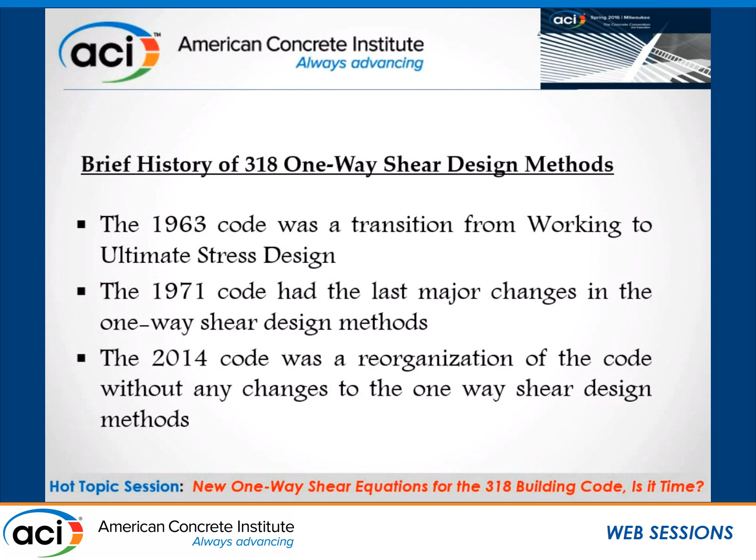They might have undergone some minor changes here and there, but the major equation that we have in the code is as old as 1971. And then, as you know, in 2014, the 318 went through thorough reorganization of the code, and only at that time were we asked by Dave Sanders to look into maybe looking at this one-way shear design equations.

If you go back to what used to be Committee 426, in 1973 they expressed the hope that the design regulation for shear strength can be integrated, simplified, and given a physical significance so that the designer can approach unusual design problems in rational manners. As a matter of fact, they wanted that hope to be achieved within two decades, so we're talking about 1993.

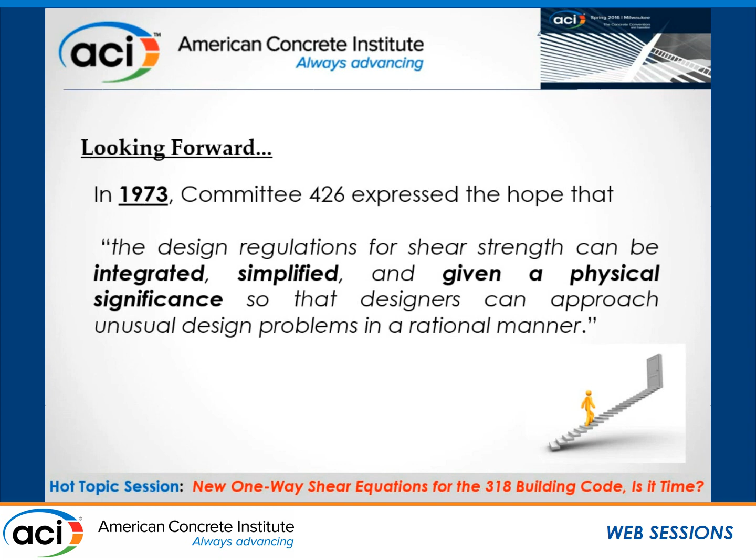We're not there yet. Right after the print of the 2014 code and before Kansas City in 2015, the chair of 318E, David Sanders, approached me and asked if we could look into the one-way shear design equation within 318 by investigating the effectiveness and safety of the current 318 one-way shear design, and also look at other models that appeared before, that people were debating, if you remember the quick fix. We started looking thoroughly at these models so we could have a groundwork to come up with some design equations.

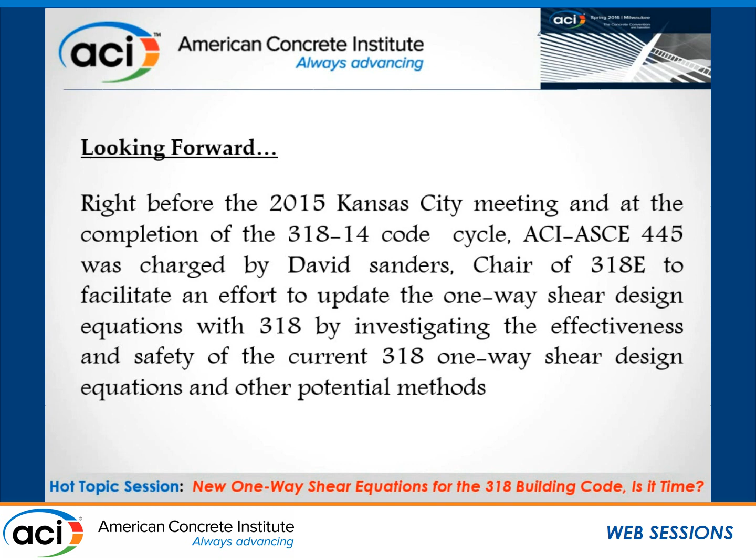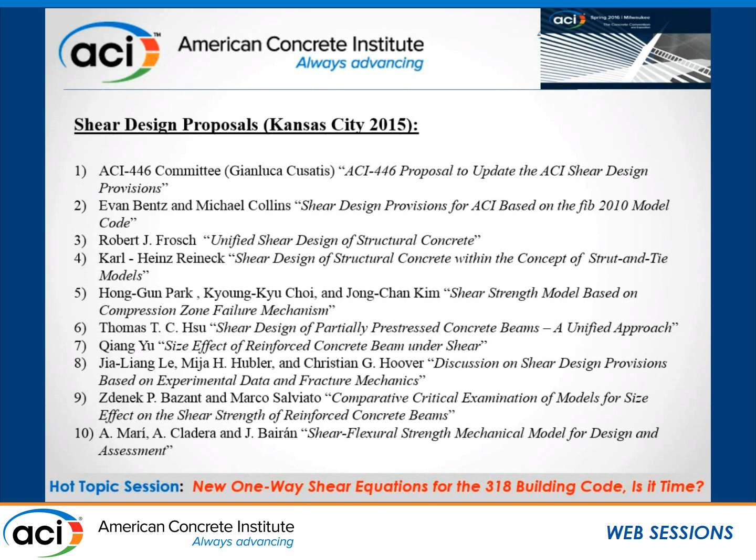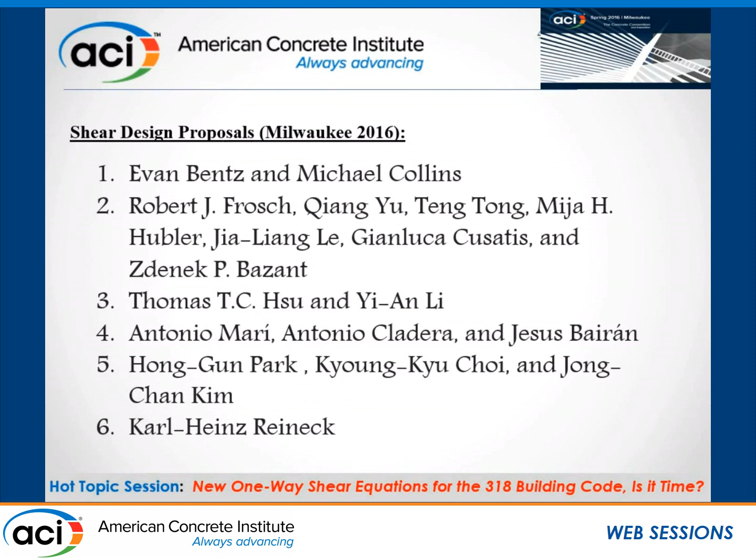So in Kansas City, we made a solicitation internationally to see who had a model for one-way shear design. These are the 10 presentations that we have at the 445 meeting in Kansas City. Since then, this list of 10 proposals ended up to be 6, so today we'll be listening to 6 proposals, and these are the authors of the 6 proposals.

Since then, what we did, we looked at all these 6 models. As a matter of fact, we started with 7 models, and then reduced to 6 models, or 6 methods. And we did 3 things.

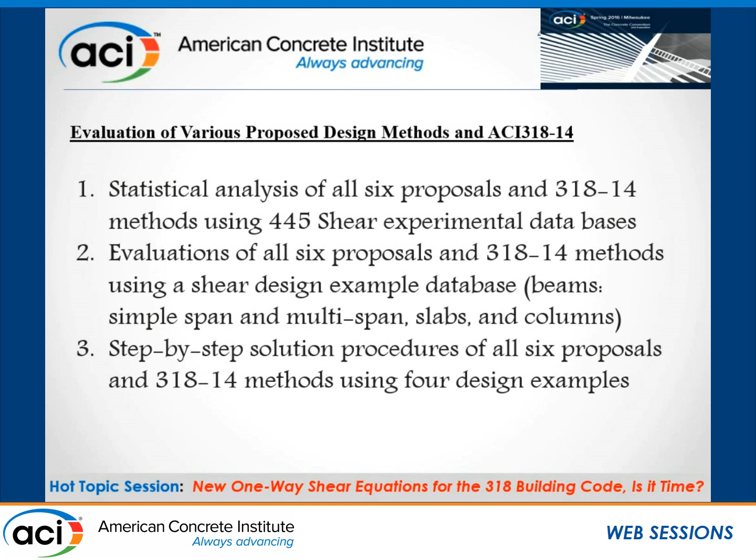One, we ran the statistical analysis of the 6 proposals, as well as the 318-14 design equations, through some experimental database that 445 has generated since then. We also looked at the evaluation of all 6 proposals against the 318 method, and came up with a design database that implements all these models for design examples. Then we asked each proposer to come up with a step-by-step calculation for 4 examples using their method.

In terms of the shear experimental database, these are some of the databases that 445 has generated in the last decade. We have 4 sets of databases: one for reinforced concrete without shear reinforcement, with 784 data points; RC with shear reinforcement, 170 data points; PC without shear reinforcement, 214; and PC with shear reinforcement, 119.

The 445D subcommittee, which is in charge of this task, is also looking at other databases, and these are the list of things they've been working on. This database, those 4 sets, has also been published in the ACI Structural Journal, September-October 2013 and September-October 2014, and we also have a report that is online.

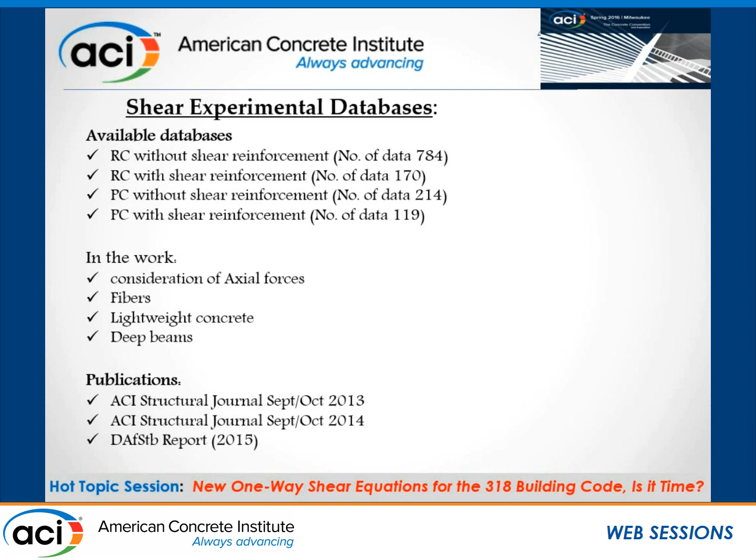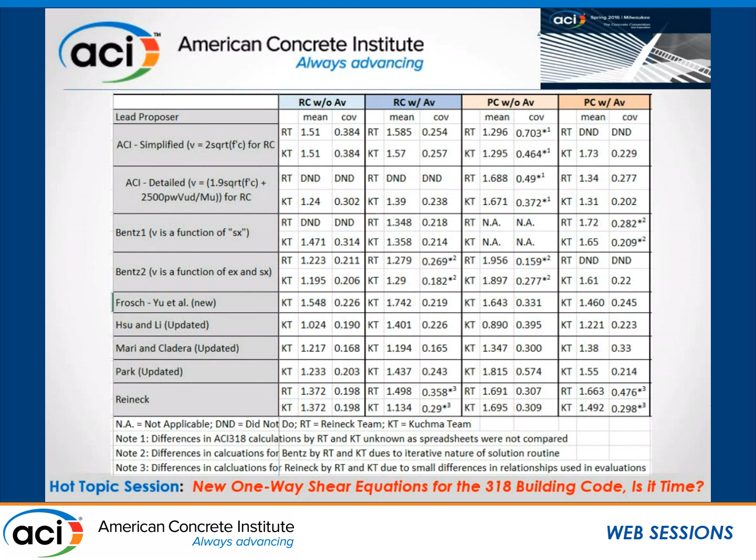I don't want to go through all this table here, but this gives you some taste of the analysis we did, the statistical analysis of all the models, including ACI 318-14. You have here the means and the coefficient of variation.

This is for the RC with shear reinforcement. This is for PC without shear reinforcement, and these are for PC with shear reinforcement.

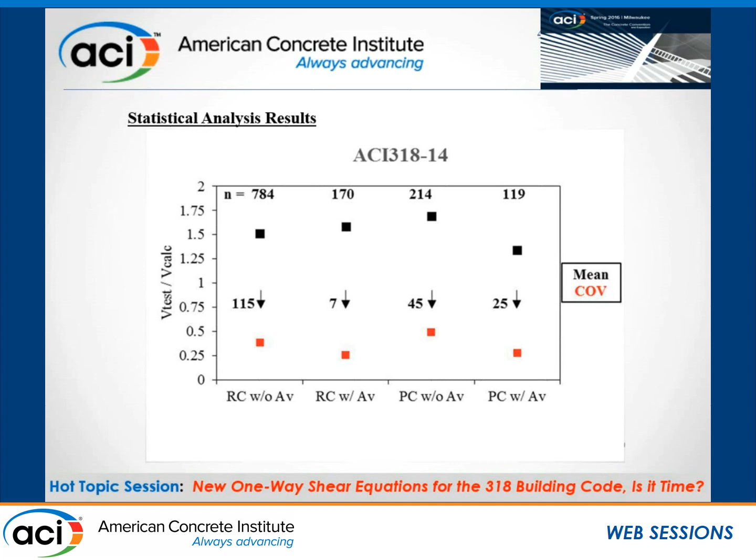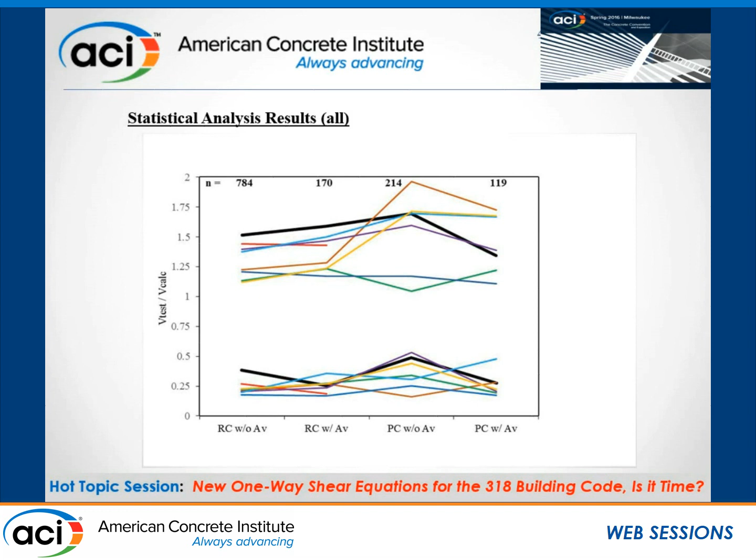On top of this, we plotted all the models that we received since then. As you see here, the dark one is ACI 318-14, and the others are all 7 models. I don't have them here by name, but these are all the various models we received. This one gives you V-test over V-calculated. This shows the low and high of all the data across all the models, and the star gives you the location of where ACI falls.

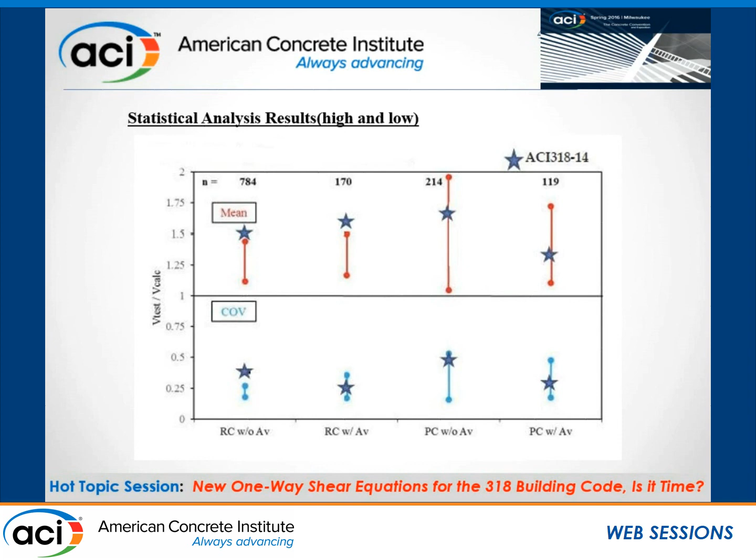So you see, for example, in this case here, all the models are slightly below what ACI is, and this is the low and this is the high. This is for the averages, and this is for the coefficient of variation.

Now, one day, David Sanders approached me, and we said, let's work on this one. He set as a goal that hopefully we can push this one for the next code cycle, 2019. And then we set here some of the dates that we have to achieve as milestones.

If we look here from the top, by October 2018 the TAC review began after the fall 2018 convention. At the fall 2018 convention we have the last convention to resolve all the negatives, and in March 2019 response to TAC comments and release to public comments. Summer 2019, a meeting to resolve the public comments, and October 2019 the code is basically finalized.

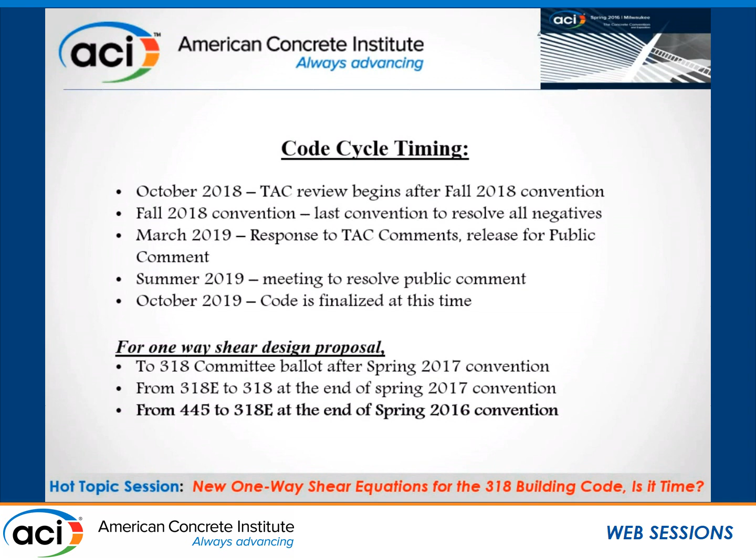As for 318E and 318, this has to go to 318 committee ballot after spring 2017, which is basically a year from now. From 318E to 318 at the end of spring 2017, and from 445 to 318E, which is basically this convention. So after today's meeting, we are passing all the packages to 318E to deliberate on.

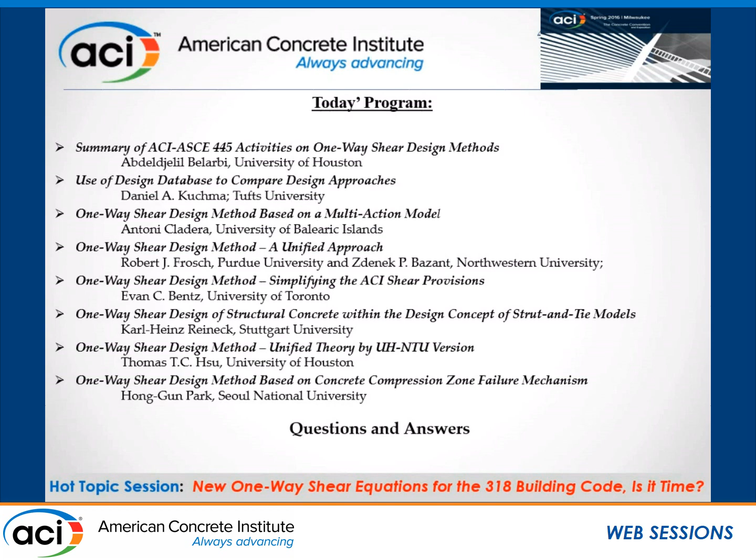This is the list of all the speakers that we have today. I was first. We have Dan, who's going to speak mainly on the use of the design example database and how all these models compare versus ACI 318-14. Then we're going to have the chance for all the presenters or proposers to speak for 8 minutes to give the attributes of their model.

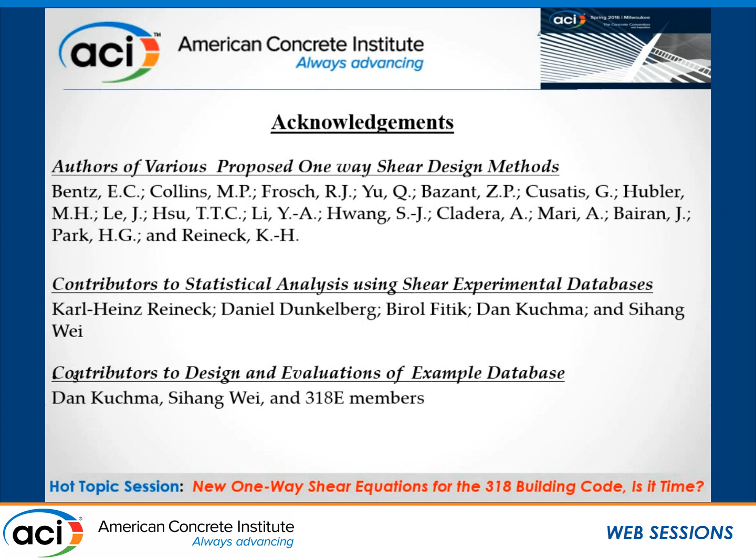Before I finish my talk, I would like to acknowledge all the people who participated in this effort. The first group are the people who are either author or co-author of all the 6, maybe 7 models — these are all the people here. And these are the contributors to the statistical analysis that was done by Professor Reineck, some of his helpers from the Europe side, with Dan Kuchma and his student Sihang, and members of 318E. They're the people who contributed to the design evaluation and the design examples. With that, thank you, and I will turn it now to Dan Kuchma.

Thank you very much, DJ. Great to see that we have a full house. DJ was right, the room was going to be a little bit small.

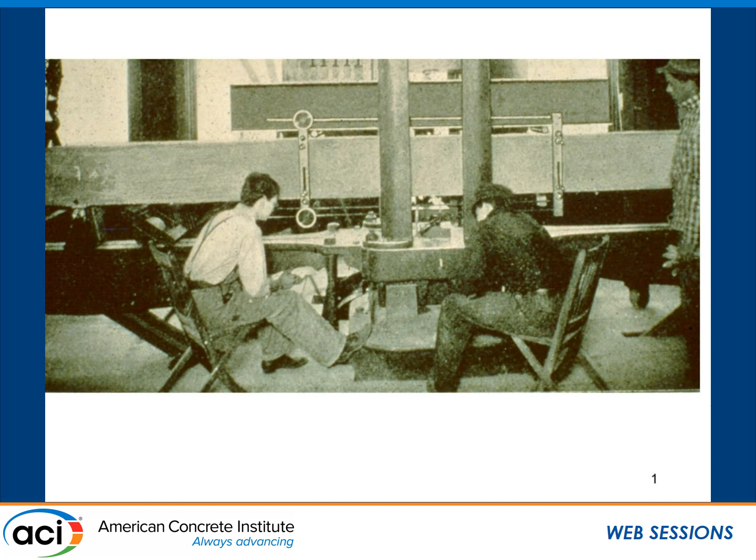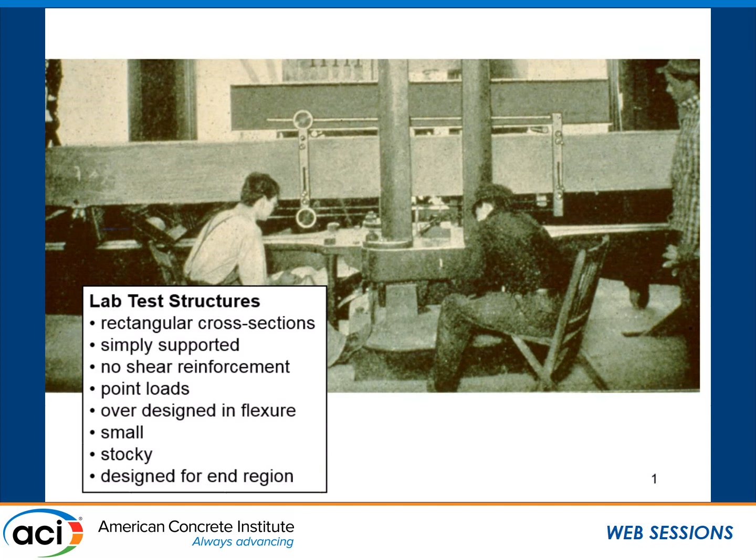So anyhow, this is a picture of some tests at the University of Illinois from a very long time ago — you can probably tell from the uniforms. DJ was mentioning that there were some comparisons made against experimental databases. I think one of the things we recognize is that what we test in laboratories doesn't necessarily represent what we build in the field, and there are a number of different reasons for that, as you can see from the various differences.

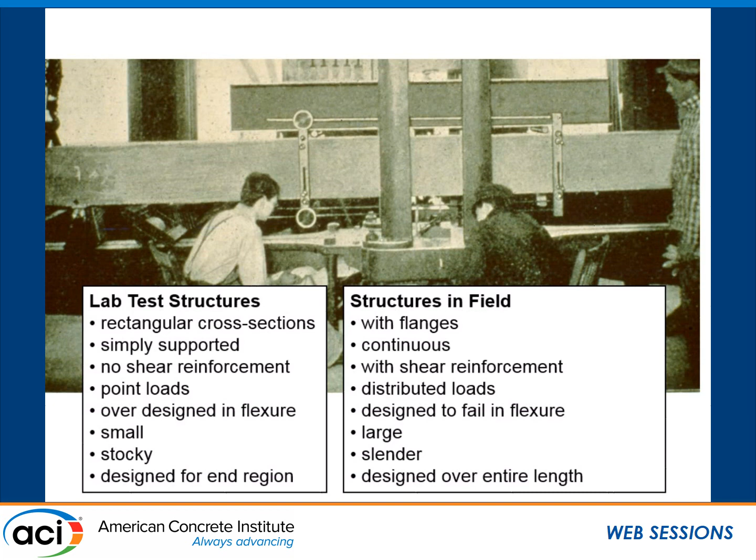Obviously there's a size and a cost factor. One of the other items that's perhaps not always appreciated is that when you look at some of the statistics from the experimental databases, it's not as if we have a uniform distribution across the various size ranges, etc., so we do have challenges with bias in experimental data that we have to deal with.

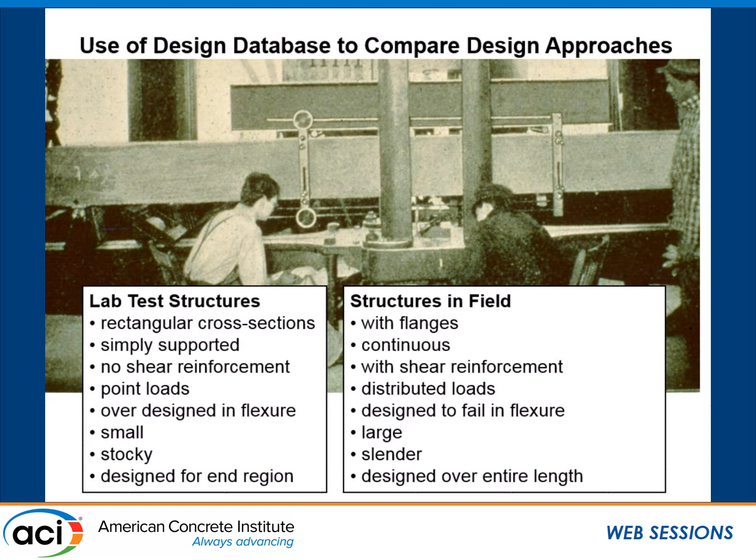What I'm going to talk about today is another way to go through and examine design approaches, where we have a suite of a large number of different design cases, and for those design cases we compare how much shear reinforcement would be required, what the depth of the beam needs to be, etc., if there's no shear reinforcement.

So there's some use in doing this, and some of the motivations are — I think a lot of this is, if you are a code of practice committee and someone is proposing a change, one question you have is: how much is this actually going to change what would be required? And one way of characterizing the amount of shear reinforcement is the percentage of vertical reinforcement times its yield strength.

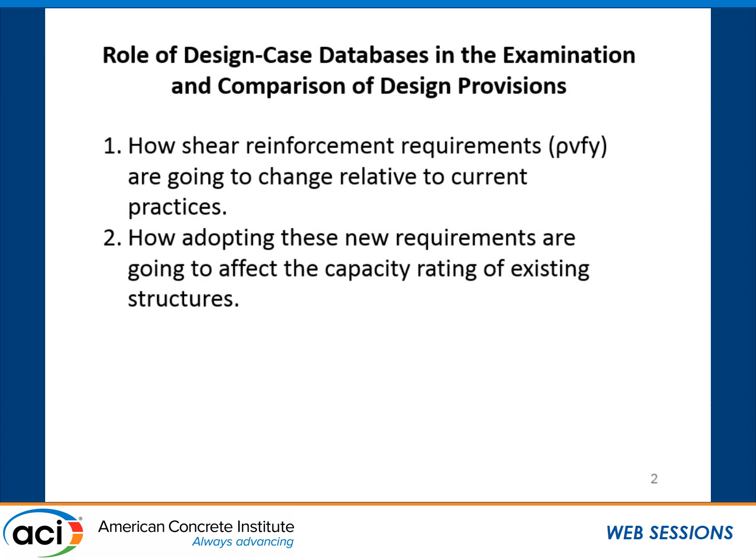And it's not just new design — very often, of course, we're using provisions for capacity rating. One of the other things, if you were a code body, you might wonder — if you see there's going to be some significant differences in requirements, you want to know where are they occurring, and are they occurring in areas where we actually think field experience is suggesting there could be improvements in performance? And so field experience becomes relevant.

What I'm going to do in the next couple of slides is talk about another aspect of what I think makes a design database useful, and it pertains to how we examine whether or not our provisions have some gaps, inconsistencies, and other types of problems.

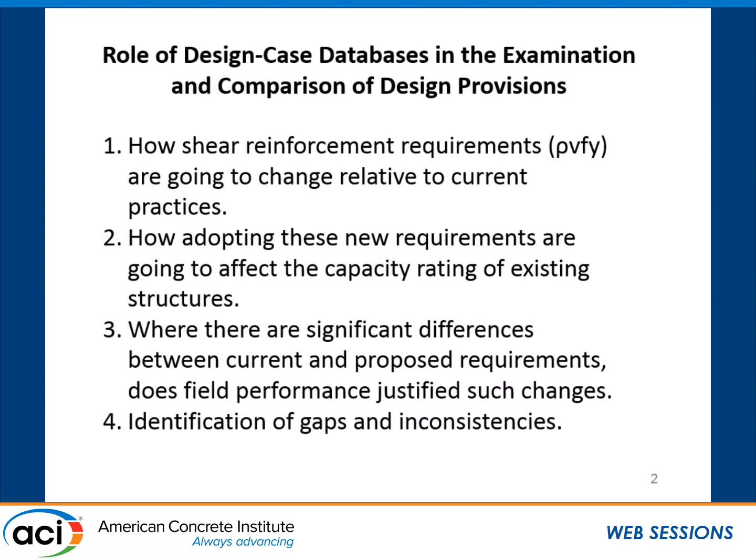I'm going to start by talking a little bit about ACI, and then I'll go on to describing this design database and how it was used.

When you looked at it that way, they said, we have this 45-degree truss for the VS, so why don't we add something we call a concrete component? It seems as if it's pretty much the diagonal cracking load, at least from a lot of tests, so let's use that. And we're familiar with our friend, VC equals 2 square root F prime C.

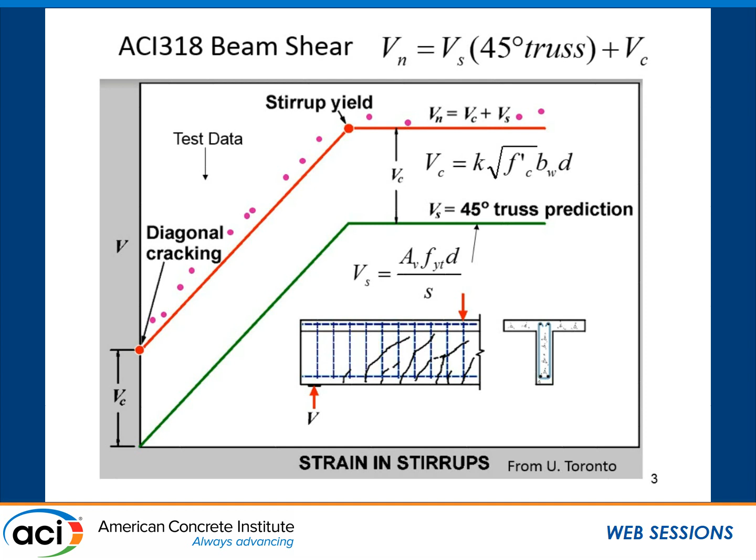But what ACI did was more like K square root F prime C, calling it the diagonal cracking load, and always adding that to the 45-degree truss. It's not quite that pure though, and I want to talk about that for a moment.

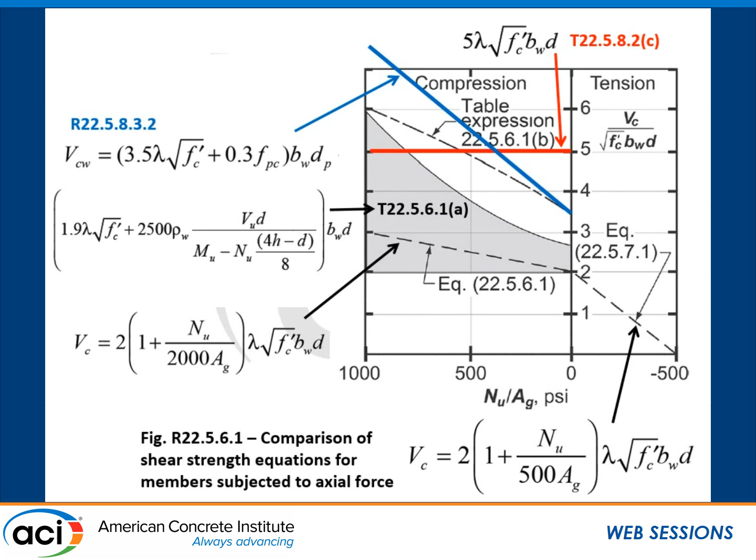There's another approach for web shear cracking, with a relationship that starts at 3.5 root F prime C and goes up at this particular angle. There's also, of course, this other one which has to do with flexure shear cracking.

What I was trying to convey in this slide is this should be something nice - it should be a line, right? What is the influence of axial stress on the contribution of concrete in shear? Shouldn't this just be a line? Should it really be this many different relationships?

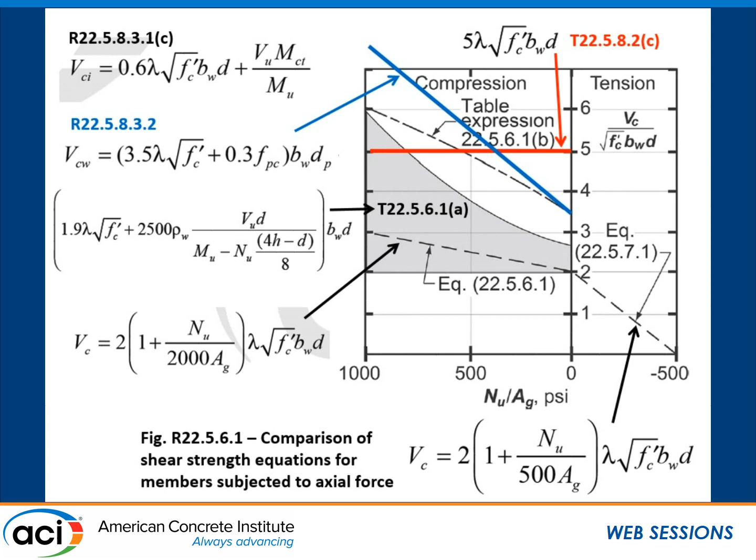So what we have in ACI - I know a lot of people characterize this effort as trying to address the safety concern for the size effect in shear, but that's not the whole story. There are other areas as well that I think a lot of people think there's opportunities for improvement.

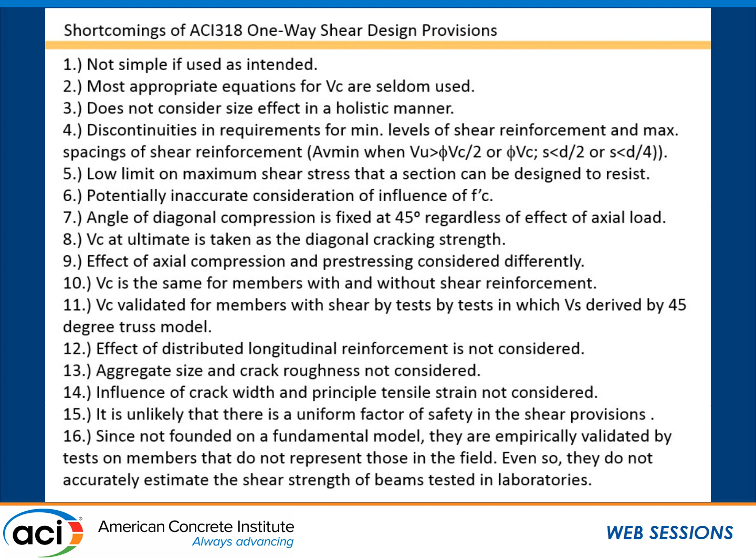What I found very nice in looking at the proposals that have come forth is that when I go down this list and think about it relative to where some of the current challenges are, I see there are by and large many fewer relationships with Vc, sometimes just a couple. Pretty much all of them can treat axial load and pre-stressing the same way. They may not have the same philosophical approach, but they agree on the principle that that would be a good thing to do. A lot of them eliminate the discontinuities that we currently have in the code. Some of the proposals also use a variable angle truss model.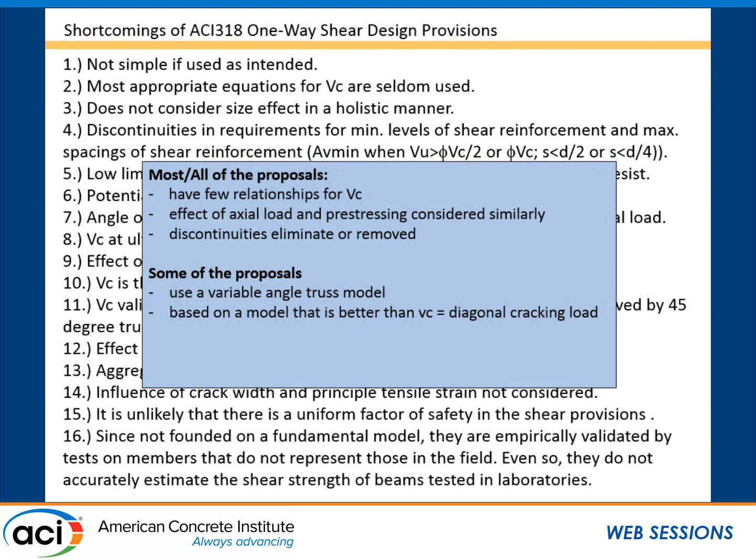I'm not saying that's necessarily something we should do, but we've moved beyond just the 45, and a lot of them are based on a model, which is helpful.

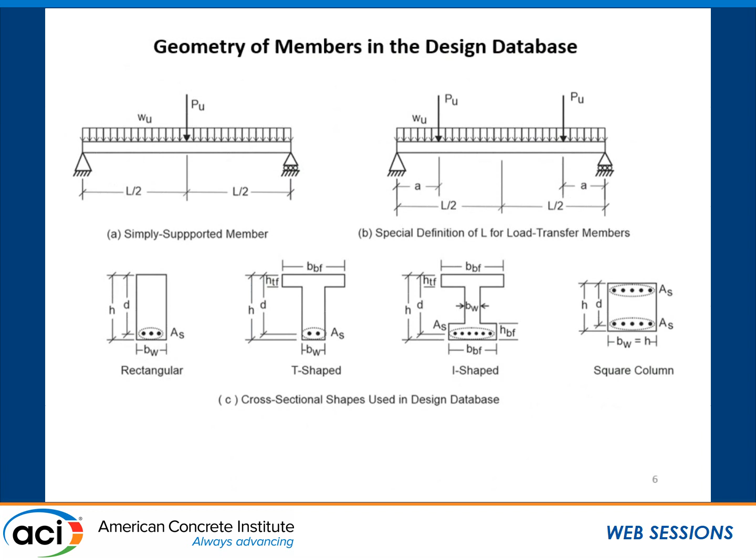Now let me describe the design database and what we've done. We looked at simply supported members, various cross-sectional shapes, reinforced and pre-stressed. We also looked at 2-span members and columns.

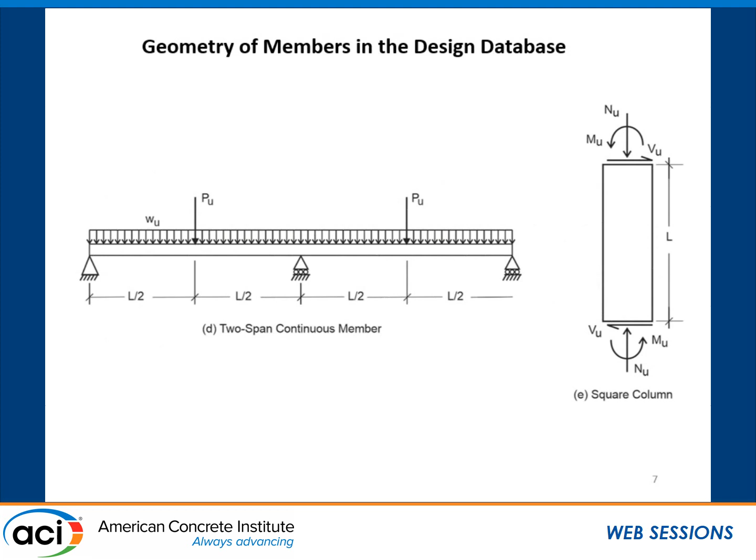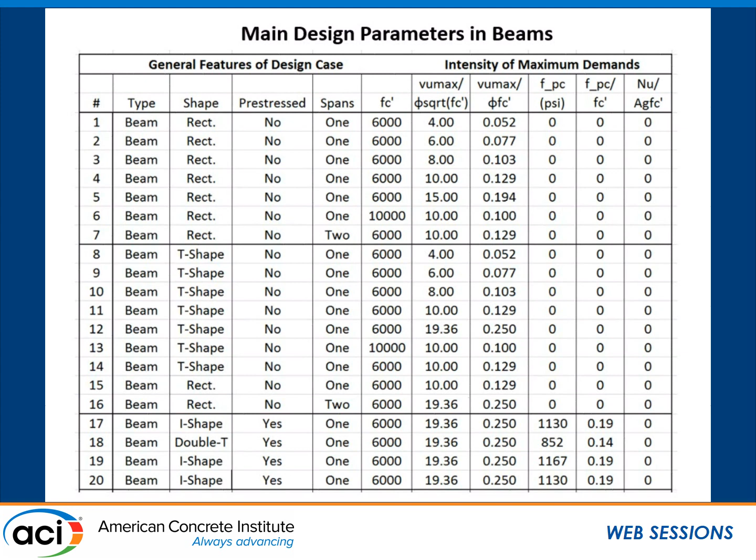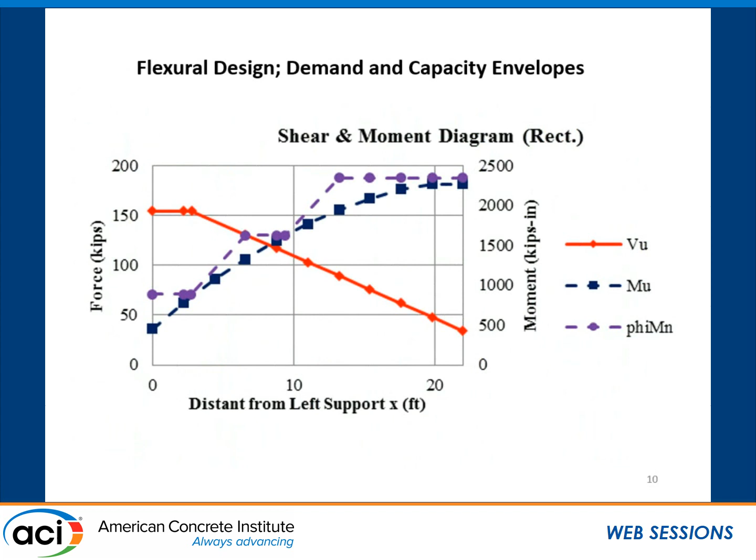The first 16 are reinforced concrete, and the last 4 are pre-stressed members. So this was the range. As mentioned, at every point over the length we determined what the shear and moment were. We did the full design for flexure, making sure the capacity envelope was greater than the demand envelope, and then we went through all the various proposals.

This plot shows the amount of steel required as a function of position over the length. Green is ACI—I'm not showing the names of the others—but this is the range of different results we received for what would be suitable levels. So it's still quite a range of ideas out there.

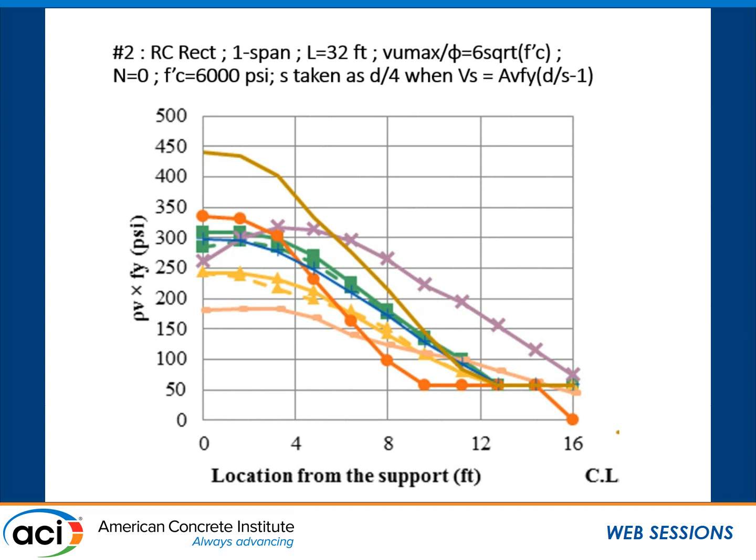We also looked at slabs, specifically slabs without shear reinforcement. For those, we asked what depth of slab would be required for different levels of superimposed load. ACI is shown in green, and as you notice, pretty much all the other proposals call for much thicker slabs. That's because of the specific safety issue associated with the size effect in shear.

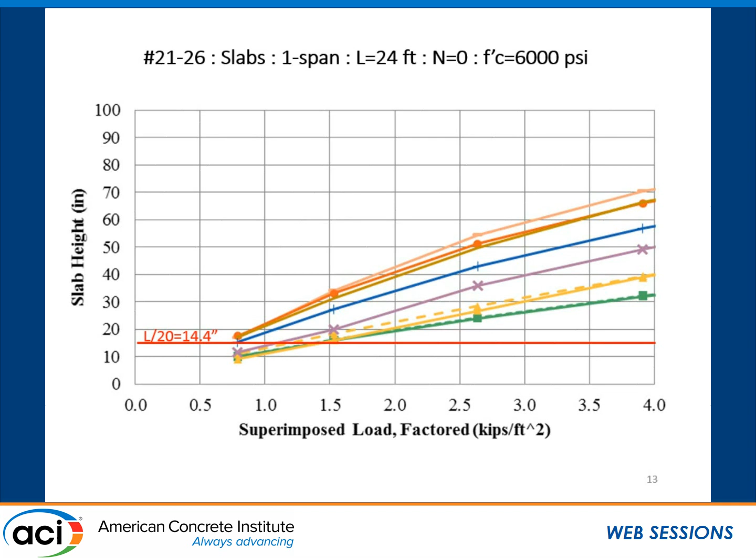So, thanks. Thank you.

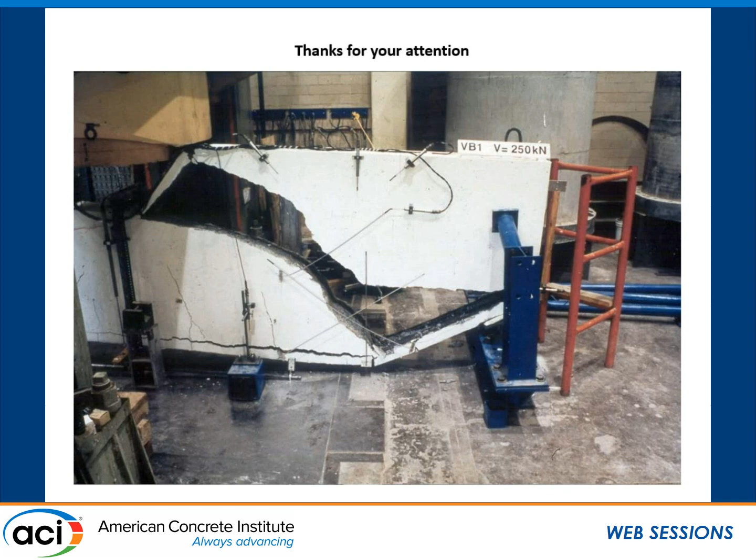Thank you very much. I'm going to present the work we've been doing in Spain at the Technical University of Catalonia, by Professor Antoni Marí and Jesús Bairán, and by myself in Mallorca.

We have presented a code proposal based on a mechanical model that we call the Multi-action Model, which takes into account the influence of the compression chord, aggregate interlock action, the tensile stresses across the crack, the dowel effect, and the steel stirrups.

When we derived the original mechanical model, we took into account equilibrium, kinematics, and a failure criterion—the Kupfer failure envelope. After that, we had one equation for each member, for each action.

What we've done is compact all the expressions, putting the residual tensile stresses inside the compression chord action and the dowel effect inside the stirrup action. This way we have a quite compact expression, as you'll see, and it's safe and economic.

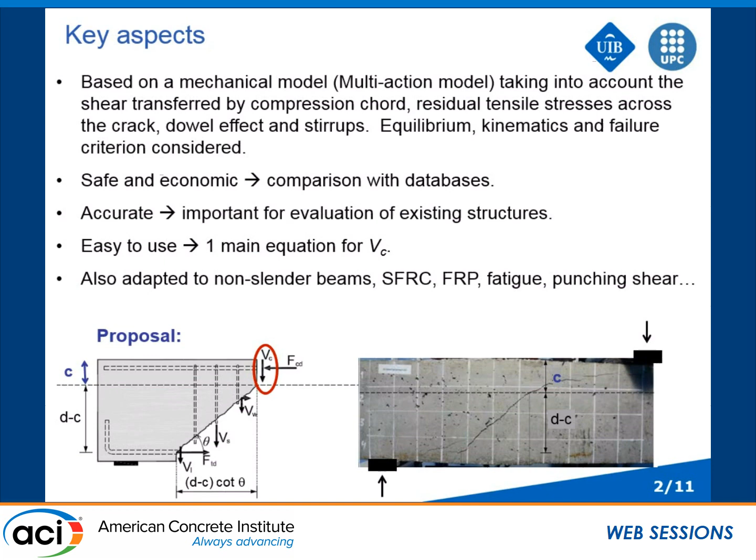We will compare with the databases. It's accurate, which I think is very important for evaluation of existing structures. It's easy to use—we have one main equation for beams for shear, plus one additional check for slabs. It's also adapted to non-slender beams, shear, steel fiber reinforced concrete, FRP-reinforced beams, fatigue, punching shear, and other cases.

Here you have the basic equation: a concrete contribution plus a steel contribution. This is the concrete contribution.

This same compact formulation is valid for reinforced and pre-stressed concrete beams, with and without stirrups, with or without axial load—compression or tensile—and with rectangular, T, or I cross sections. The key parameter is the neutral axis depth, or the relative neutral axis depth.

This is the steel contribution, and we have an additional check for the strength of the strut. This equation comes from plasticity theory—it's the same equation we use in Europe in the Eurocode.

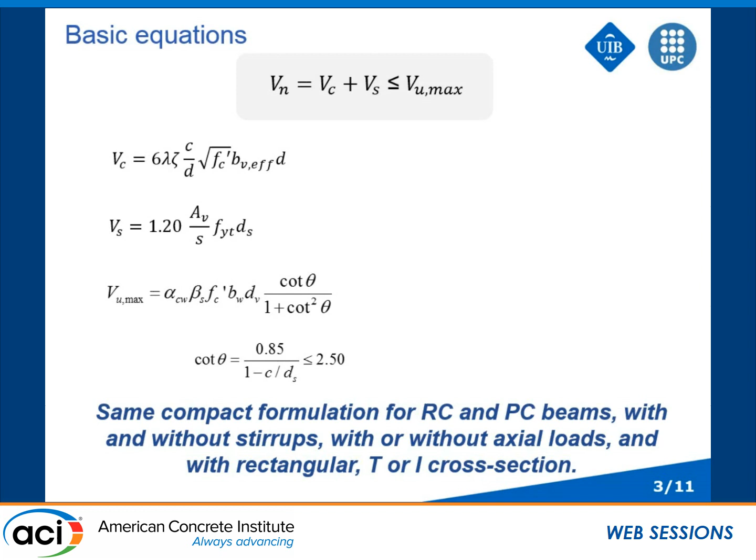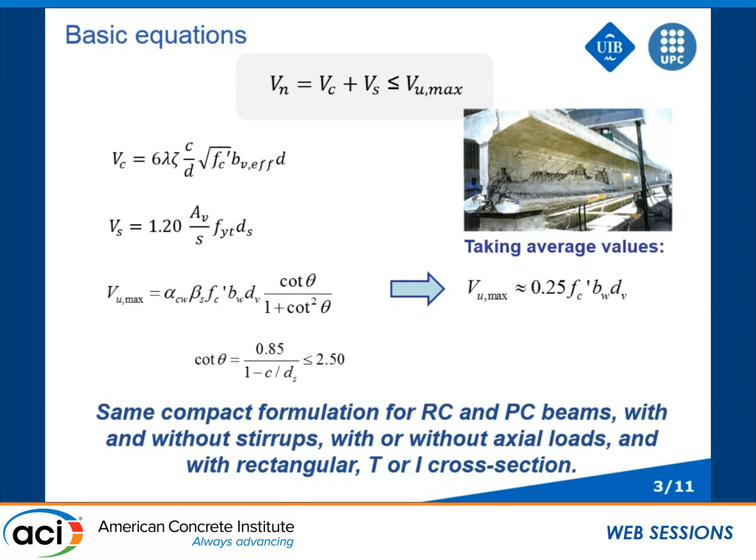This equation may be a little more complex, but if we take average values of the different parameters, we get something from 0.24 to 0.27, which is quite similar to the expression given by our Canadian colleagues—though of course it could be simplified. And again, the key parameter is the neutral axis depth.

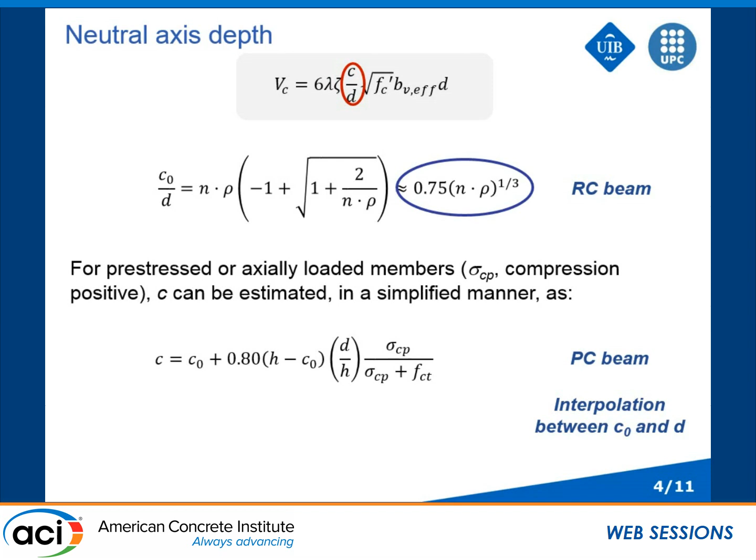You can calculate, as you all know, for reinforced concrete beams, but we propose just to use a very linear equation, very easy to use. And how are we taking into account the pre-stress actions or the tensile loads? We just change C over D. For example, for pre-stress concrete beams, we made an interpolation between the reinforced concrete solution and D, taking into account

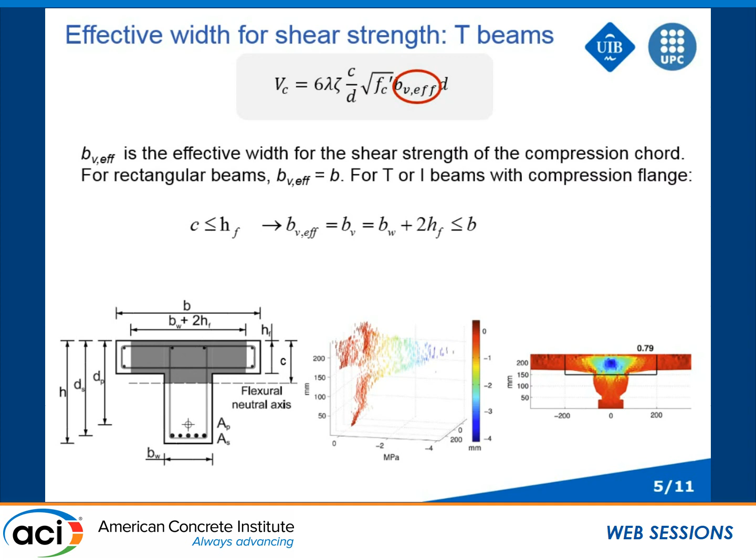the stresses, the compression stresses here in the web and the tensile strength of the concrete. Then another key aspect is that we take into account the compression flanges by means of this effective width for shear strength. This value is very easy to obtain when c is lower than hf. It's just the width of the web and 2 times hf here. And this allows us to take into account the compression flange effect.

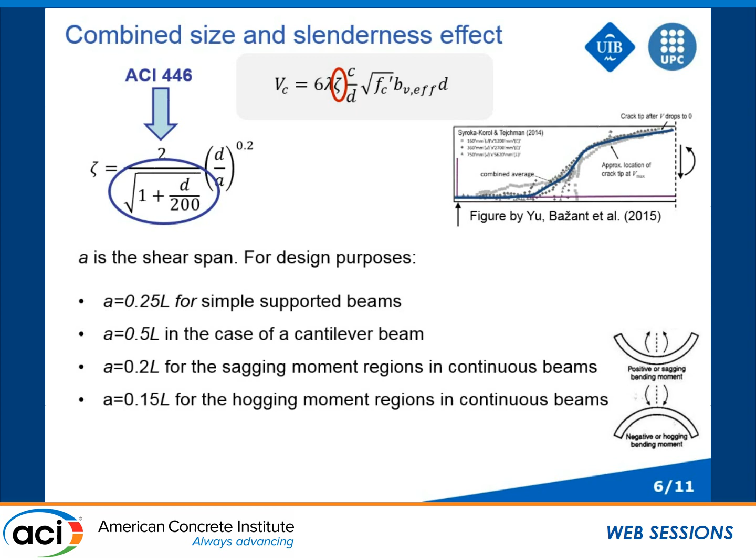And then we have also a combined, what we call a combined size and slenderness effect. We have improved the size effect since the last meeting, and in fact, we have adopted the ACI 446 coefficient here, or Professor Bazant's size effect, as we all know. We shared some emails with him, and we saw that, in fact, the models are quite similar from a conceptual point of view, and we also take into account the slenderness.

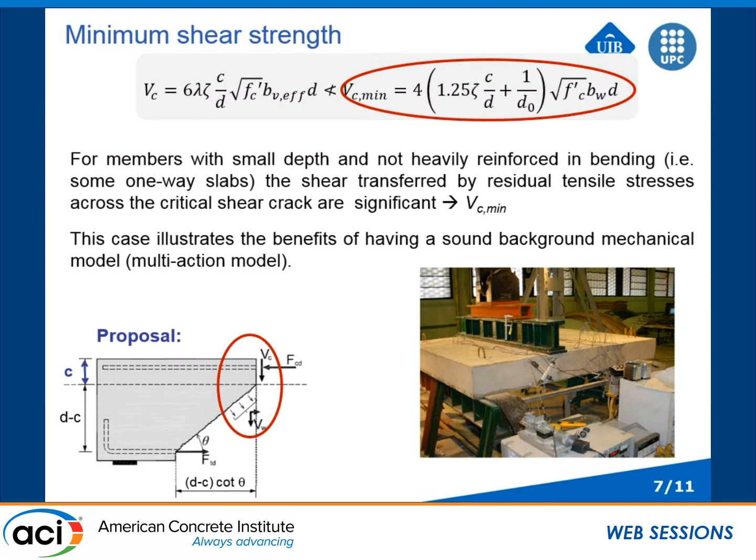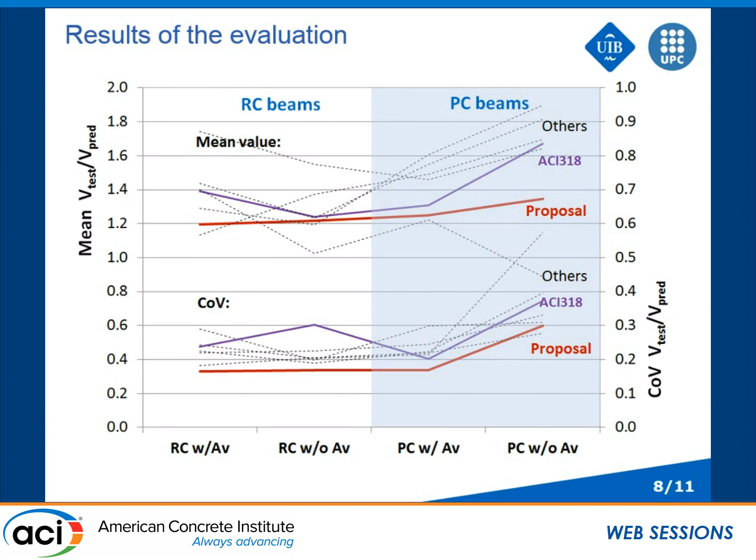Well, here you have the results of the evaluation. Thanks to the work by Professor Kuchma, you see that the proposal has a very constant mean value of the experimental strength. This is Vtest over Vpred for our proposal, always lower than ACI, and also the coefficient of variation is very steady. It's a little bit different for prestressed concrete beams without stirrups, because here we have two different cracking possibilities, and that's why it changed a little bit for our proposals.

At this point, I would like to share with you one thought of Dr. Golder. He wrote this down in the first issue of Geotechnique, and he was talking about earth pressure, but maybe he was thinking of shear strength, I think, because he was saying that for the engineer, there are many possible answers to a natural problem, all of which are compromises between the truth and time. His answer must be sufficient for a given purpose, and for this reason, an engineer must make assumptions.

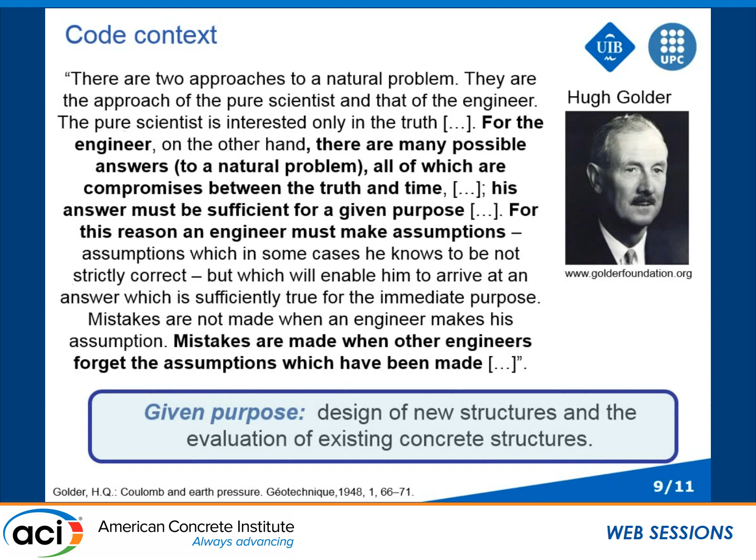I think this is very important because we are going to see different models. I think they come from different assumptions. They are not more correct or less correct. They must work for a given purpose. And I think that we have always been thinking about designing new structures and also the evaluation of existing structures. For us, it's very important to think about evaluation, because 25% more stirrups, for example, is not a problem when you are designing new structures, but it can be a problem when you have to strengthen a structure.

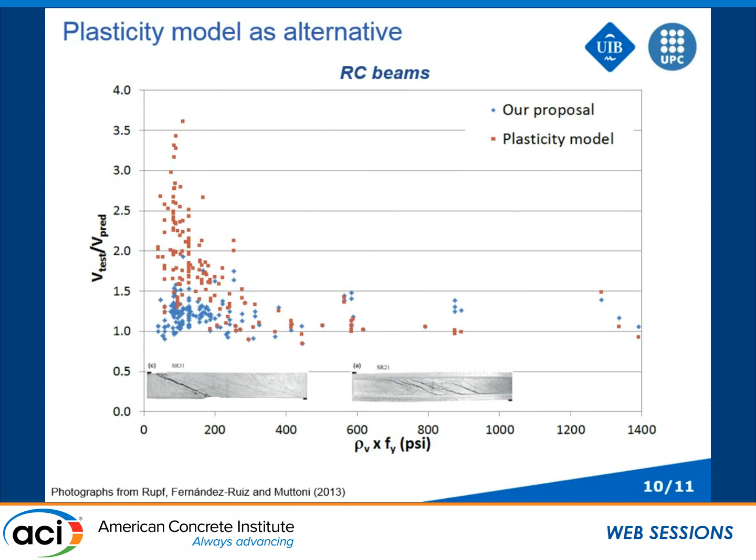In Europe, for example, we are proposing to combine our model with a plasticity model, because plasticity models without concrete contribution work very well for beams heavily reinforced in shear, but they perform poorly for beams with a low amount of stirrups. This is the plasticity model, the red dots, the current model in the Eurocode. The blue dots are our model. So, for example, in Europe, we are proposing to combine both.

Just to conclude, I think that the proposed model has very easy to use equations with a sound mechanical background. One main equation for VC, valid for reinforced concrete and prestressed concrete members, with and without transverse reinforcement, with I, T, or rectangular cross-section. It takes into account the beneficial influence of compression flanges, and the mechanical background allows its extension to different cases. We have worked even for punching shear with this model, and the predictions are accurate, and we think this is important for evaluation of existing structures.